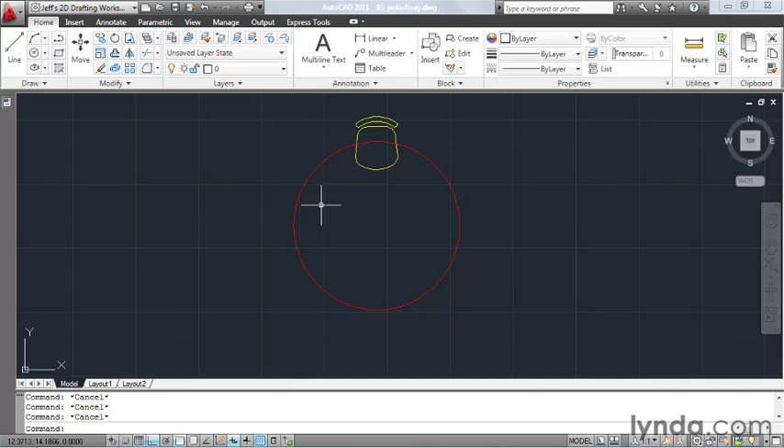Array is located in the Modify panel of the ribbon. The icon's right here. When I click to launch the tool, it brings up the Array dialog box. This is where I get access to all of the settings that I'll use to build my array. Notice there's two types, the rectangular and the polar array. We're going to look at the polar array right now. Polar array allows us to create copies of our entities in a rotational pattern.

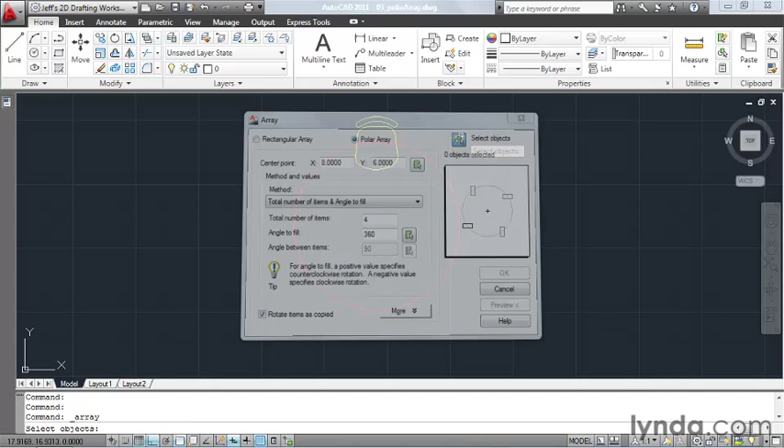I'm going to click Select Objects, and then I'll select the object I'd like to copy. In this case, it's the chair. Then I'll right-click. Now let's take care of the center point. The center point is the point at which I will be copying my objects around. I can enter a coordinate here. I can enter an X and Y value. Or if I click this icon, I can pick a point on screen. I happen to have a running object snap set for center, so I'm going to select the center of this circle.

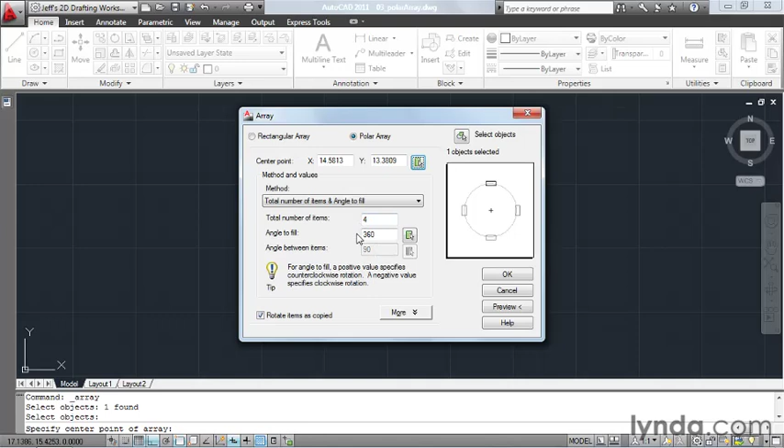Now let's take a look at the total number of items. How many objects do I want when I'm done? Currently this is set to 4. I'm going to leave that alone for right now. Angle to fill, 360. This means I am creating my copies around a full 360-degree circle. On the right side of this dialog box, I can see a rough preview of what my array is going to look like. If I was to make a change, for instance, I will change my angle to fill to 90, and I'll press Tab to accept that value. We can see the preview change over here.

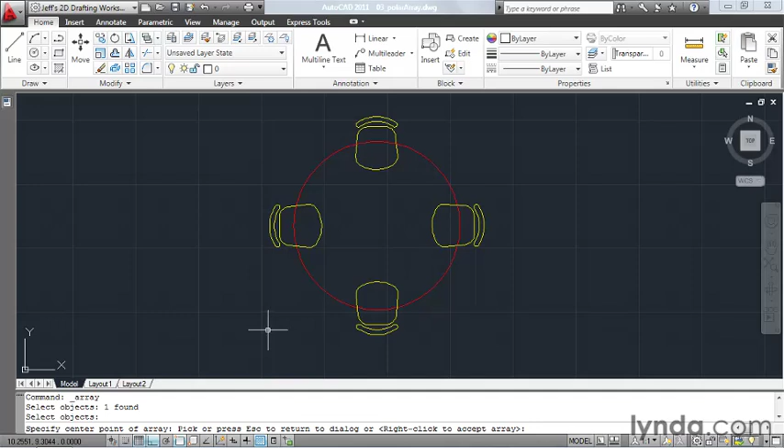I'm going to change this back to 360, and then I'll come down and click Preview. And this looks pretty good. Take a look at my command line. Notice we're in preview mode right now. That means if I like the array, I can right-click to accept it, or if I want to make a change, I can press the Escape key to bring back the settings.

Now, I think we can fit a few more chairs around this table. I'm going to set my total number of items to 6, and I'll click Preview. That looks a little better. I'm going to right-click to accept my array. I'm sure you'll agree that making copies this way is much faster than doing them manually.

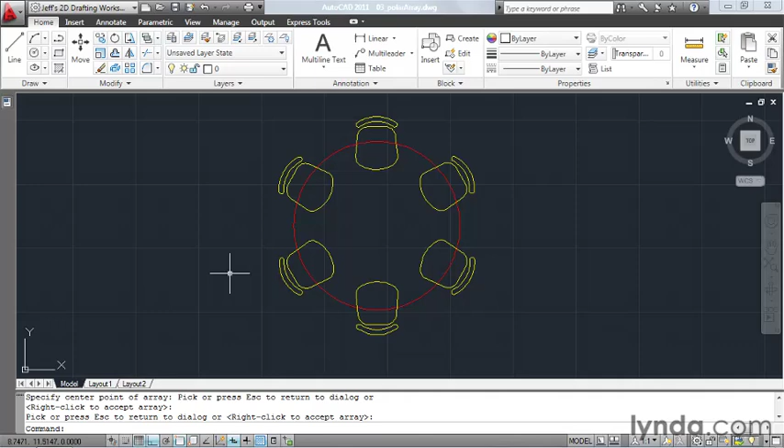Now that we understand the workflow behind the polar array, let's try and use it in a practical example. I'm going to pan the drawing over. On my screen, I have a finished drawing of a motorcycle sprocket, and I also have an unfinished version. At first glance, it might appear like this sprocket would be complicated to draw, but in fact, the only geometry that we really need is this geometry that we see on the left side. The rest of this part can be completed using polar array.

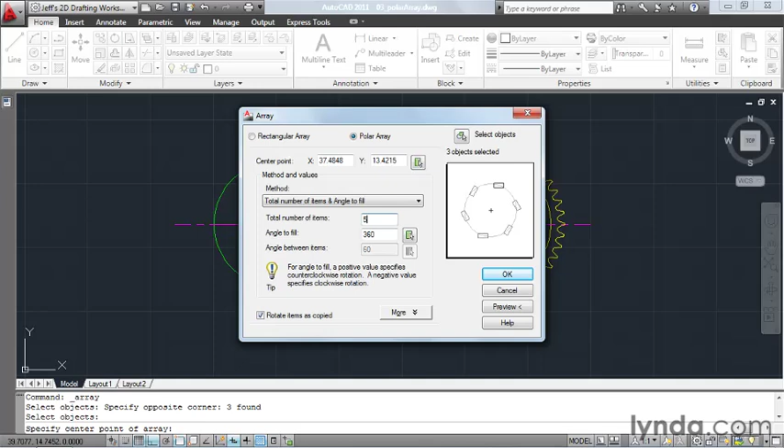Let's take a look at these holes first. In the finished example, it looks like I need 5 sets. So I'm going to launch the array command. This will be a polar array. I'll click Select Objects, and I'll make a window selection around these circles, and right-click. I will then select the center point of my array. That will be the center of this circle. Total number of items will be 5. I'll leave this at a full 360 degrees, and I'll click Preview. That looks perfect. I'll right-click to accept the array.

Finally, let's take care of the teeth. This finished sprocket has 42 teeth. And as you can see, I've already worked out the geometry, and I've created a single tooth and a single gap. If my calculations are correct, we should be able to create 42 teeth around this part, and they should all meet seamlessly end to end.

I'm going to relaunch the array command. I'll click Select Objects, and I'll window this geometry, and then I'll right-click. I'll select the center point of my array, the center of this circle. Total number of items will be 42. Let's click Preview. Everything looks really good. I'm going to right-click to accept the array.

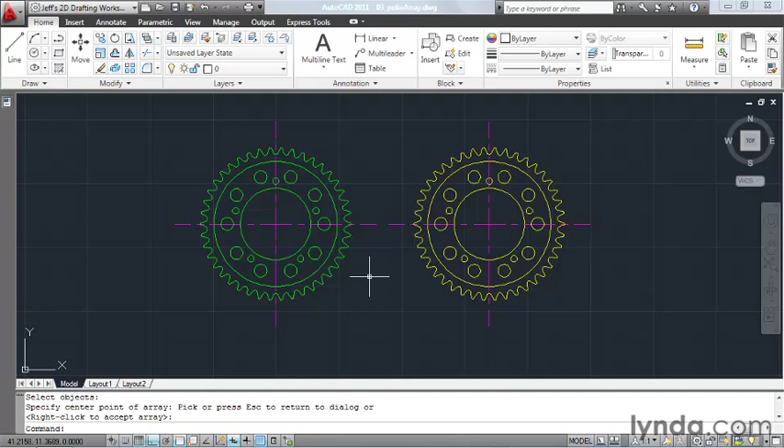Keep your eyes open for objects that fall into a rotational pattern. A polar array can save you a lot of time over creating manual copies.